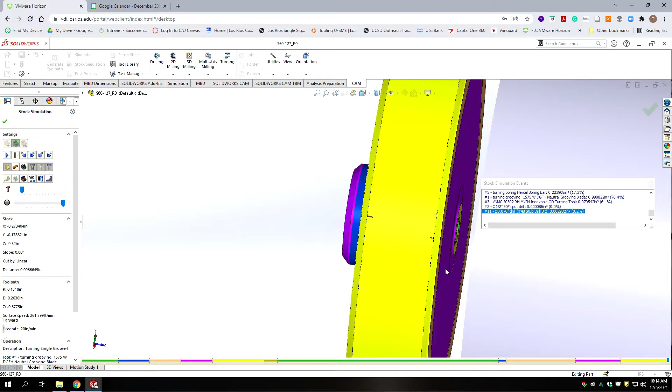So all we need to do is the 6-32 tapped hole and the interior work, which we can copy from the first side. Okay, so let's do that.

We're going to click on lathe op 1, copy, and then paste. Then we need to right click on it and make sure we make it the default folder, so anything new we do is in there. We're going to change the name to op2, and we can delete the 1 in brackets.

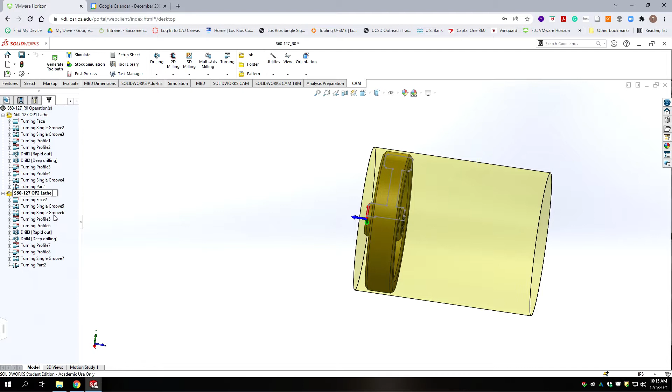Okay, and we're going to go into that setup. We edit it, and it's still a turn op. It's going to be op2 for the lathe. We're going to keep a cylindrical stock, but at this point we don't have any extra material on any of the sides.

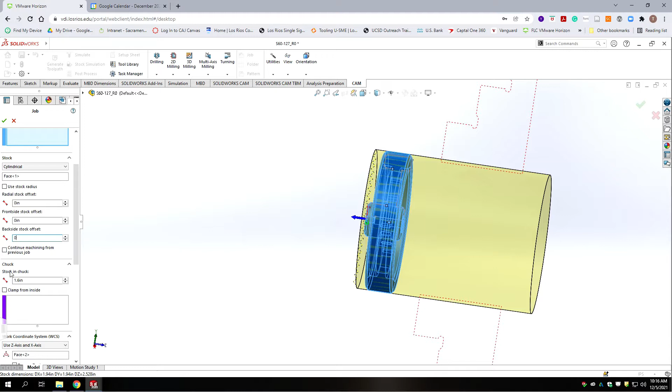Okay, we're continuing from the previous machining job. How much is in the chuck? That depends on how we're holding it. If we were going to hold it on the outside, it'd be the majority of the part. If we're going to hold it down on the hub, it would be just the hub.

For safety, I'm going to go ahead and assume that we have it in the chuck, and so we're going to set that as if actually the majority of the part is in the chuck. We shouldn't be doing any exterior work.

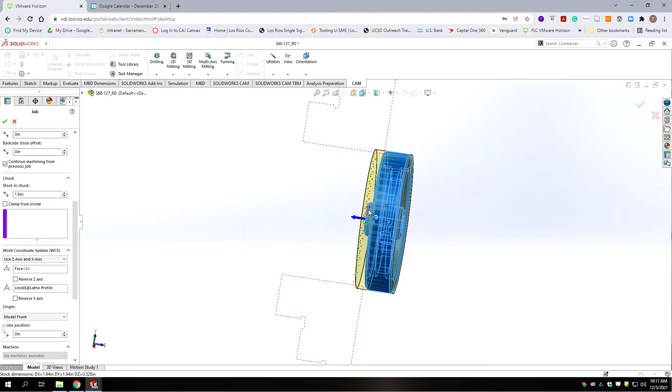Now, from a surface finish standpoint, I'd much prefer to hold this with a collet. It doesn't damage the surface like a chuck does. Won't make marks on that nice machine finish we have on the outside. It's also easier to keep things safe. Assume worst case scenario, we don't have access to a collet for this.

It's really for collision detection, that's the purpose. So in our model, our overall height of our part is 0.52. So let's put that in, 0.52.

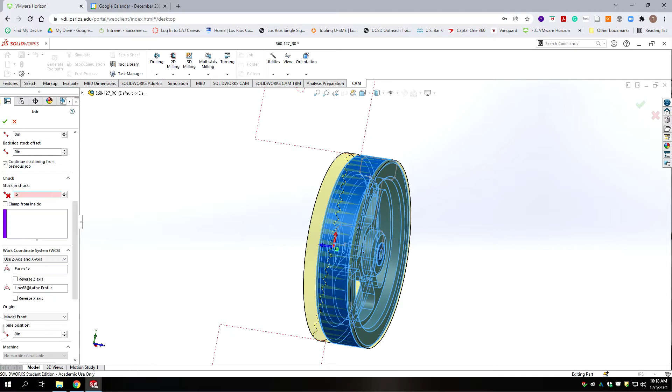Now right now it's facing the wrong direction. Okay, it's backwards in our chuck. And that's because of our origin.

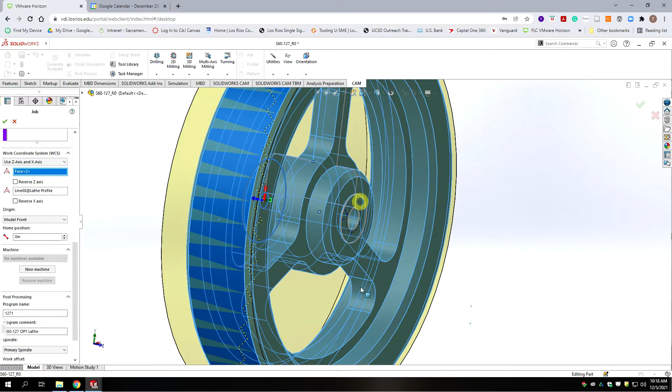Okay, so we're going to scroll down, and it's still going to be model front, but we're going to change the face that we're using for Z, which goes to the opposite side. And the X is still facing in the same direction as our sketch, so that's good.

The outline of the chuck is now changed, so we don't need to reverse anything. It should look like this. Make sure it's in the same orientation as your sketch.

And then we're going to go back and we're going to change our program name to 1272. It's going to be op2 for the lathe. And then we can accept that.

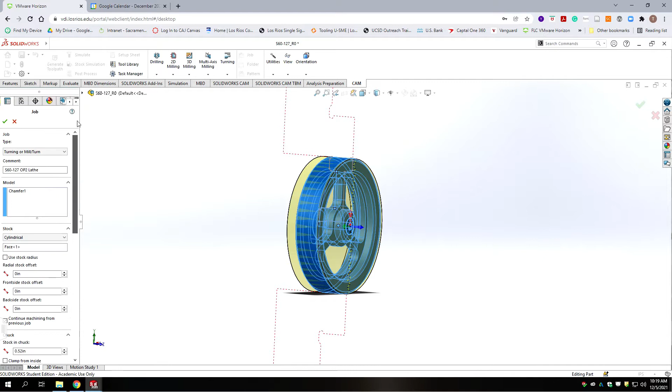Okay, so there's our new stock. In reality, this material is not really even there anymore, but if you wanted it more accurate, you'd have to model the part at different levels of stock.

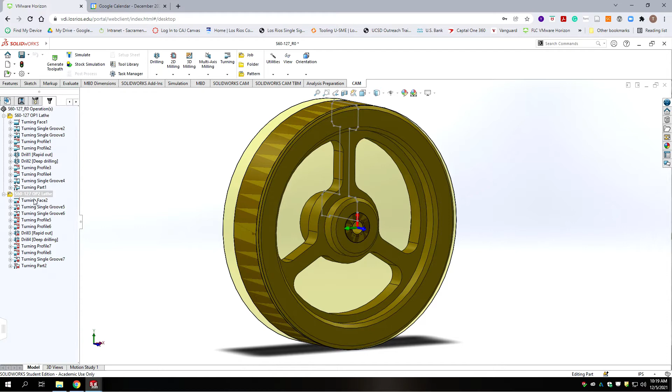Okay, so of all the routines we have here, we shouldn't really need a facing operation. So we don't need that operation. Assume we've got our process dialed in enough that we don't need to do that over.

Okay, so then we're going to go to the next step, and we've got our turning groove, and that came in and just did a partial groove here. We don't need it. And this is the one for the backside.

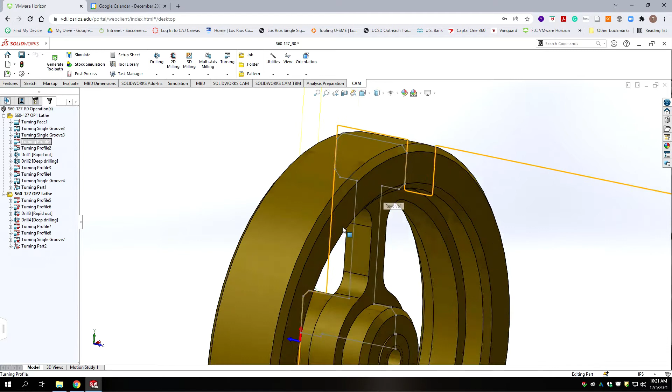Okay, so then we got our turning profile. So that was turning profile 1 on our previous operation. So that one came in and did a chamfer. We don't need that one because we can't reach the chamfer with this particular tool.

So we're going to have to redo that routine. We could leave it in there, but I think its job is going to be taken up by a completely different tool. So let's go ahead and remove that turning profile.

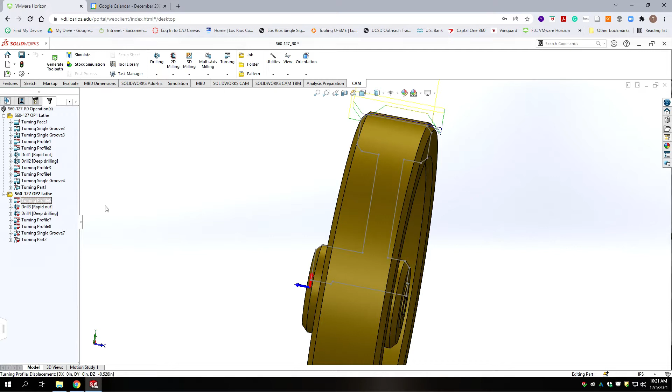Now this second turning profile is doing the outside, so we don't need that one either. Okay, we've gotten down to our spot drill.

We'll need that. We'll need a deep drilling cycle, but we're going to use a different drill bit, so we'll recycle that one, and then we're going to have to add a tap cycle.

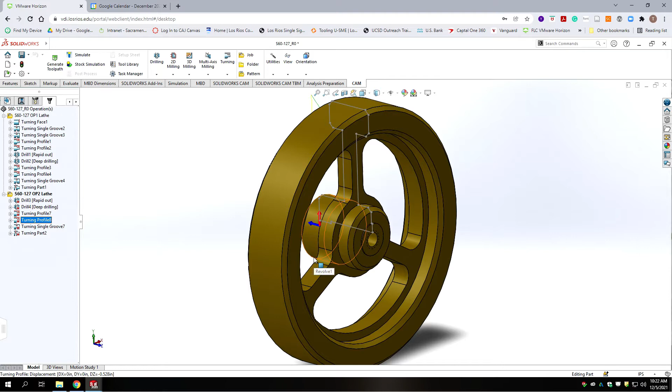All right, let's go to the turning profiles. Okay, so we've got our initial groove. We're going to need that. We have a hub on this side. And then we have our next turning profile that machines the balance of the pocket away.

We need that. And then we had our single groove that came down and cut this feature here. We no longer need that. And the last one's the parting operation, which we don't need either because we've already done that.

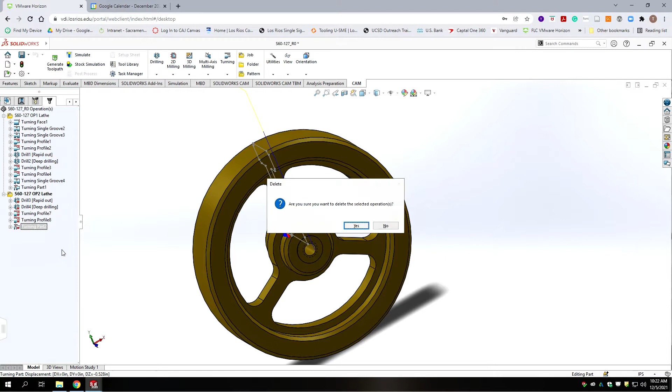Okay, so we got this reduced down to 4 copied routines. We're going to have to add a couple to do chamfers. At least one to do a chamfer, and we're going to need to add a tapping cycle. Other than that, we've got everything ready to go.

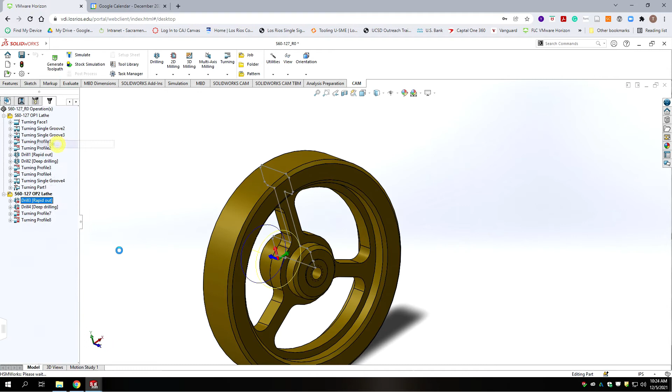Okay, well, let's just follow suit and let's just start with what we've got. So we've got our spot drill. We're going to edit the spot drill. And we want to go to a chamfer that's big enough that it accommodates the major diameter of the thread.

Okay, so the nominal major diameter of a class 2 6-32 thread is 138 thousandths.

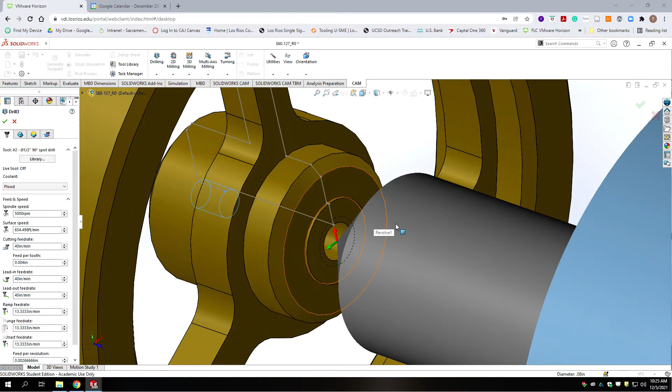Okay, so we're going to go to the Geometry tab. We're not cutting the face that's selected. We're cutting the hole from the other side. We're going to the Next tab, and we want to put

negative 138 thousandths divided by 2. We're going to subtract 0.01 from that number, making it larger. Negative number, go a little bit deeper.

Next tab, or accept the default, and accept. Okay, so we have a chamfer that should be slightly larger than the threaded hole once the thread's established.

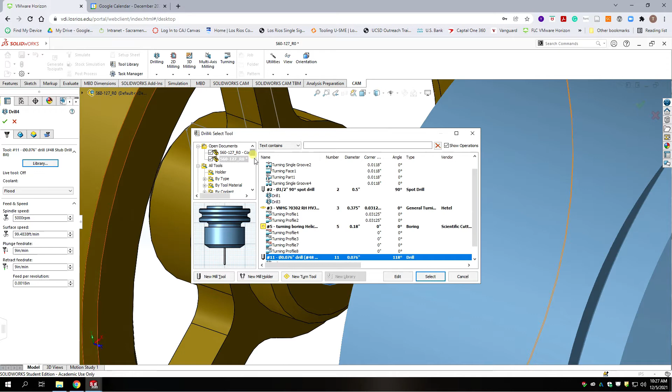Okay, we're going to go to deep drilling. We're going to go edit. And we need to switch tools. We need from the lathe library, we need the tap drill for the 632.

So if we look at our list, the tap drill for the 632 is the tool number 9, 107, number 36 stub drill.

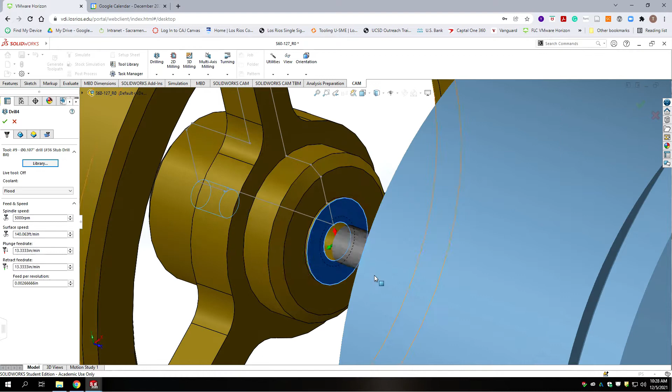Okay, we're going to select that drill. It should be a little bit bigger than the last one we had. We can leave the feeds and speeds alone. We're going to select our hole, which is the threaded hole.

And if you notice it's going shallow, that's because some parameters we have set that we've copied from the previous operation. So in the previous operation, remember, we selected a face as the bottom, and then we said we wanted to go 0.14 deeper. Okay, so we're going to go from hole top, but we're not going to go to

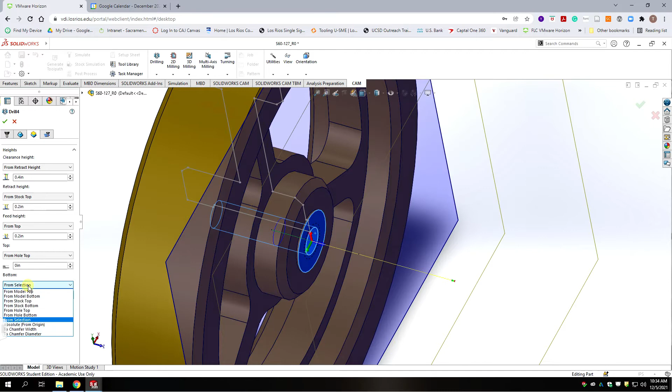the selection we have here. We're going to go to hole bottom, and we don't want to extend 140 thousandths or we'll blow out our 2 millimeter hole at the bottom.

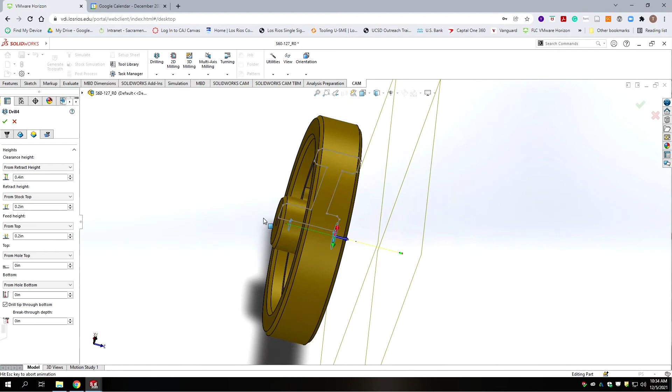So we do want to break through with the tip, but we're going to put 0 under the parameter for breakthrough depth. So the resultant should be pretty much what we modeled at this point.

Okay, we're going to the next tab, and we're going to do a peck depth of half the diameter, so 0.107 divided by 2. So our peck depth gets a little bit bigger because it's a bigger drill bit.

And it's not going to be taking a full diameter off because remember we've already pilot drilled this with a 2 millimeter. So this actually might be a little conservative, but it'll make a little noise, but hopefully it'll be a truer hole the way this works.

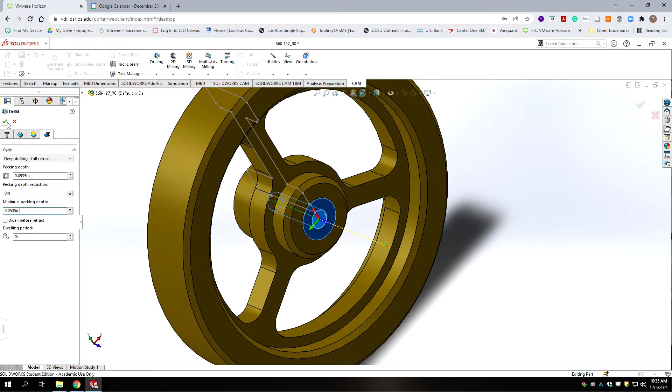Okay, we're going to hit accept. Alright, so now we've got our threaded hole going through, or the tap drill for it.

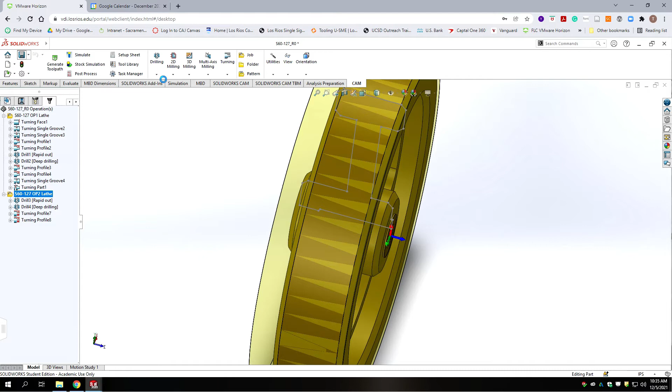Now we want to go ahead and do the tapping. So we're going to go drill. We're going to select from the library. We're going to go to the lathe library, which I keep skipping. The lathe tool library, and we're looking for our tap.

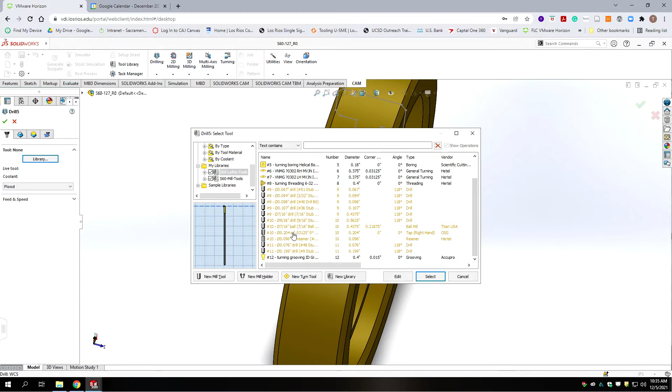That's tool number 10. I never liked 1000 RPM with a tap. They break so easy. It's not worth it. Okay, we're going to select our hole.

And we're going to go to the next tab, and we're just going to go to the bottom. We don't want to break through. We should have enough clearance at the bottom of the hole, so the default setting should be fine.

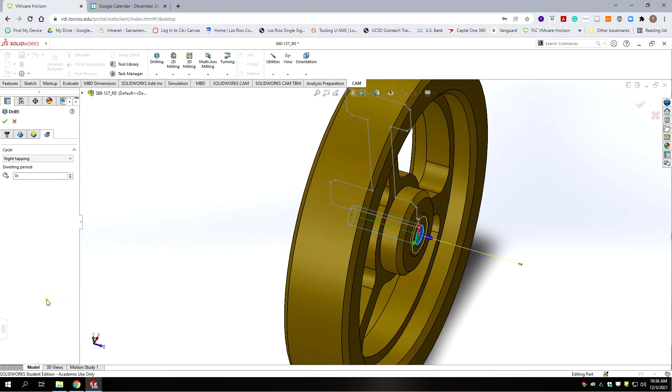I would force it to be right hand tapping. It outputs a different code, but just to be careful, and hit accept. Okay, so there's our threaded hole.

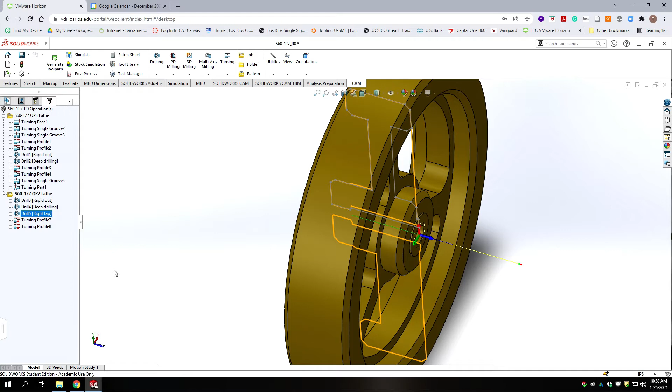Now sequence wise, it doesn't really matter whether we do the drilling before the turning, but you want to put the drills together so they can go in sequence. Typically you put them in the magazine or the turret close to each other so they don't have to move very far on tool change.

Again, we need to do a relief groove, which is this first routine, and then we need to do the turning that's going to remove the rest of it. We're going to use the same boring bar, but as you recall, we had to use two different sets of geometry. So currently we have the wrong sketch shown for this profile.

Okay, so we're going to go back to the lathe tools, and the first profile, we're going to edit it, and we should be able to keep most of the parameters the same. So we'll leave the first tab alone.

On geometry, we're not selecting this line. We're going to select the one that's on the side of the part that we're working on, but it's good that it highlights which one we're using. So we'll select the opposite side.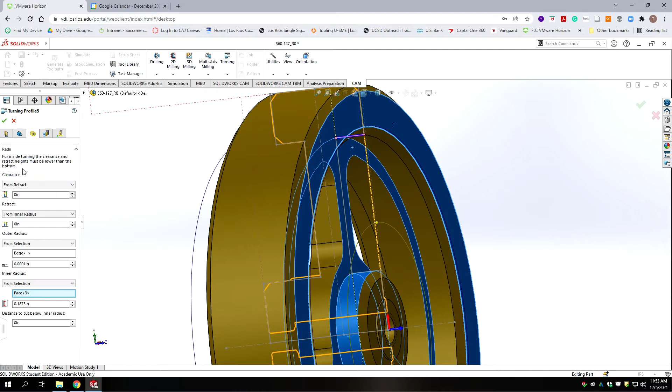We're going to need to select confinement, and we're going to select the top and bottom of our pocket. We'll go to the next tab, and then we're going to go to our heights, and I think we can leave this all at default, and we should be able to leave all this at default. And on the last tab, we should be able to leave all this at default.

So let's hit accept. Yes, we've got a safety warning. We want to go straight in and straight out, and we get our groove. And now this makes it safe for our other cutter to come in, or the same cutter to come in, but to do multiple passes and drag back without hitting material on the back side of the tool.

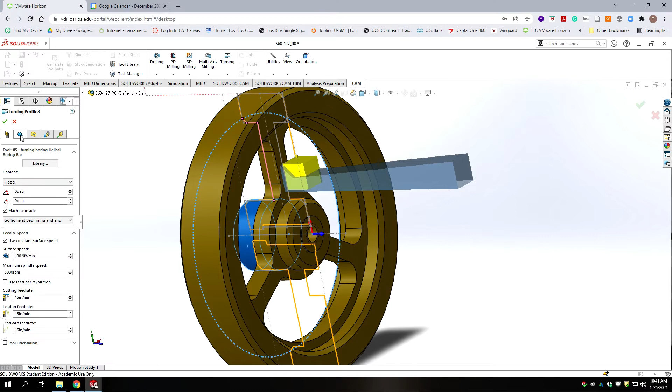Alright, that was relatively painless. Now let's go to the next one. We're going to edit this routine. We're going to leave everything the same on the first tab, we're going to leave it alone. On the next tab, instead of these three profiles, we're going to clear those out.

And then we need to switch our sketches. So if you pull down this menu, if you're careful, we can now hide the revolve sketch and display our section view, which is what we need for this one.

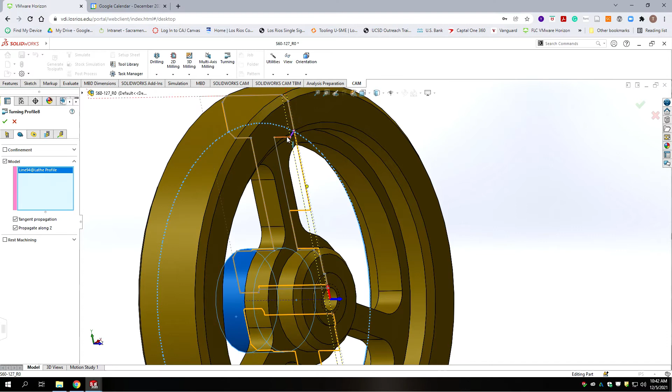Okay, now that we've done that, we're going to select the chamfer, this line, and this line. We go to the next tab. All this should be pretty much at default. We can keep the same face selected, but to be safe, let's switch that over to the other side.

But when we do that, we have to reset our spacing. So we had that set at 300 thousandths when we had it selected before. Next tab, we're going to leave it default. Last tab, we'll leave it default. We'll hit accept.

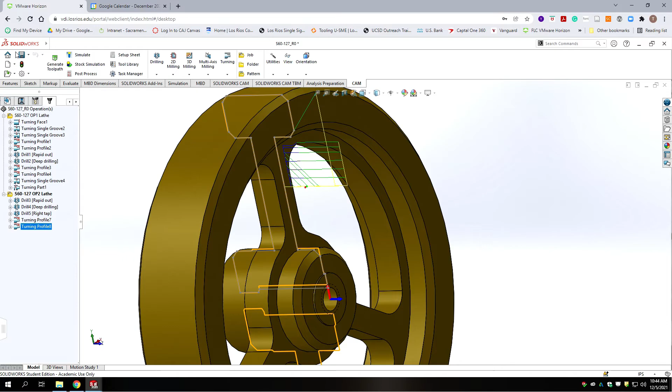And now we get our routines that just cut in that zone. We're going to do the last routine for this part, and that's to cut the chamfer on the hub here. Not a real critical feature, but we do want to make sure we don't gouge anything else.

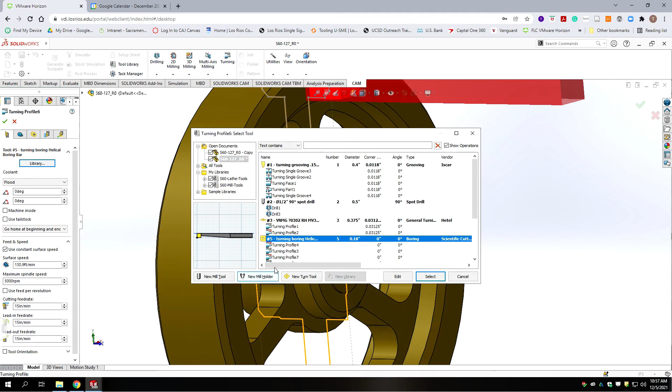So we're going to go to turning, and we're going to do a turning profile. And we're not selecting the default tool that's coming up here. We're going to go to our lathe tool library, and we're going to take tool number 7.

Okay, we'll leave everything at default on the feeds and speeds. On the geometry tab, we're going to select model, and we're going to select the single segment. Then on confine, select the larger face, and then we're going to pick the edge of the boss, not the surface, because it'll force it to machine that surface.

And we're going to go to our outside tabs, and we're going to go to selection, and our selection is going to be the outside of the hub, convenient diameter, and then we're going to go to selection on the second, and we're going to pick the edge of the top of the smaller diameter of the chamfer.

Going into the next tab. Okay, we're going to switch from allowing axial and radial grooving to not allow any grooving. We're not going to do any rough cuts, and we're going to use wear compensation. On our last tab, we want to increase the retract amount to 0.3, which is a significant amount. We want it to pull out so that after it cuts the chamfer, it's not going to retract into our outside diameter.

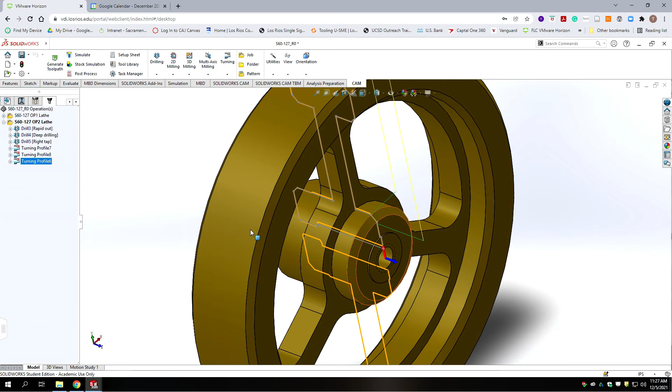Okay, and we don't want the lead out to be the same. So we want that to be at 90 degrees. And we want it also at 0.3 so that we make sure we clear the part. After that, you should hit accept. And we should get the toolpath that looks like this. So it's cutting the absolute minimum on the diameter.

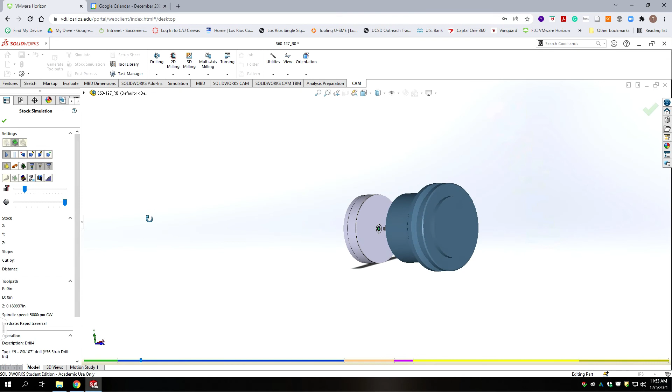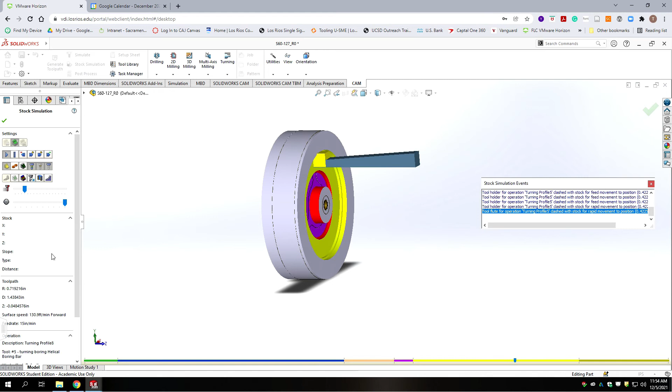Okay, so I'm going to do the quick simulation. It'll show what the second side of the part looks like. Center drill, coming in with the tap drill. I'll speed this section up on the video. Tap. Of course, we're getting our gouge warnings from this tool that are phantoms. And then we cut our chamfer. Okay, so we should be done with that operation.

Now it's time to move on to milling. We've completed our turning operations. We're going to collapse these down because we need to do one milling operation. Now I would suggest that we use this boss here as a locating feature. Everything is turned around it. You could potentially even put a 2mm pin in to locate more accurately.

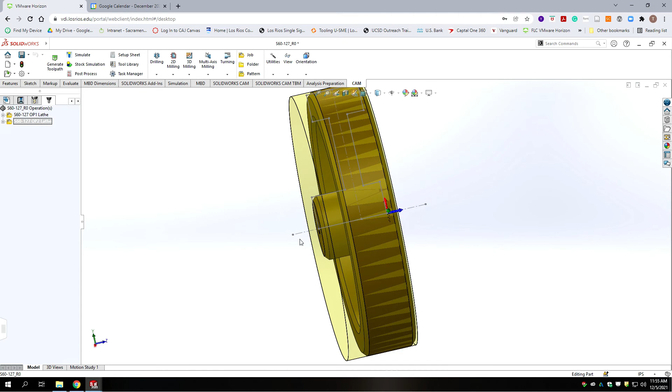And then we can clamp on either this surface or this surface in a vise with a soft jaw or fixtures that center it. And then we're going to come back and just cut these windows. So it's really only one routine, but the setup for the fixture to build this would actually take longer than cutting the actual part. So there's different ways of approaching this.

I'm going to put the origin at the top center, and that would allow us to use a probe or indicator to locate center of this hub off any of these round features, or even the outside diameter of this pocket. And that would allow us to dial it in so that at least these cuts are as close to concentric as we can after switching processes.

Another approach would be to put the origin at the bottom. You would indicate on your fixture instead, then drop your part in. That might be a little more accurate in the sense that you would be locating and indicating in on the side of the part that was turned first, and so that would be concentric to the majority of the features which were made on the first operation.

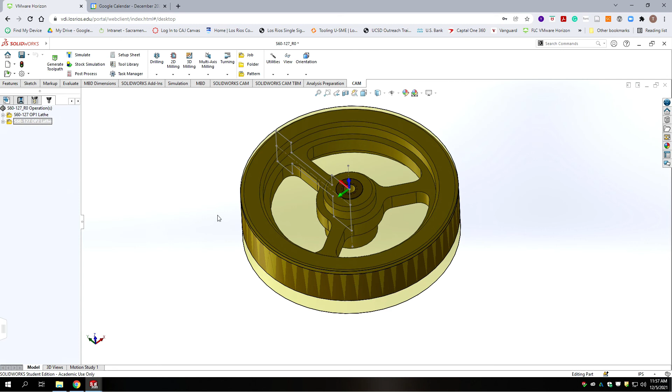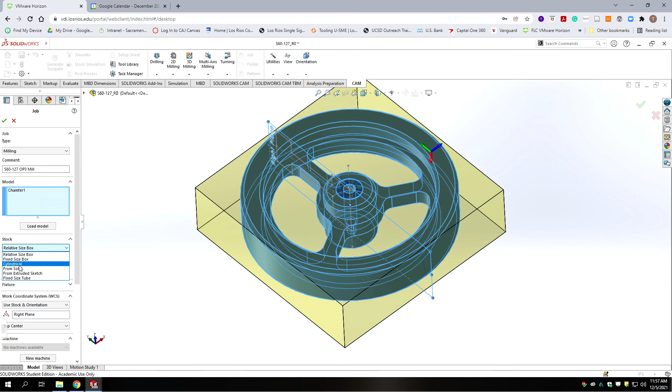But there's different approaches. So again, let's go with a new job. This one is going to be milling. This will be the S60-127 Op 3 for the mill. Okay, we're not using a relative size box. The stock is actually the part itself, but we're going to be cutting. Yeah, let's just say it's from Solid, and we're going to select the model itself as the stock.

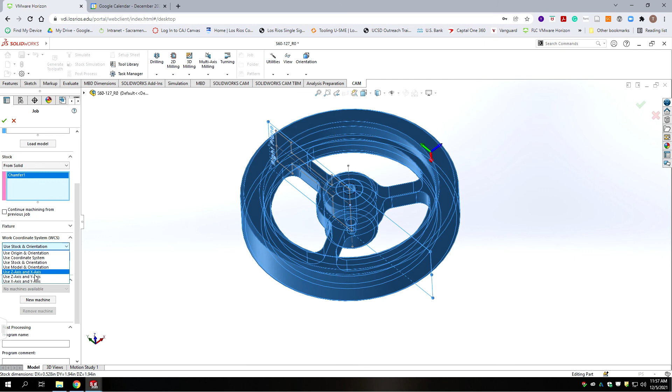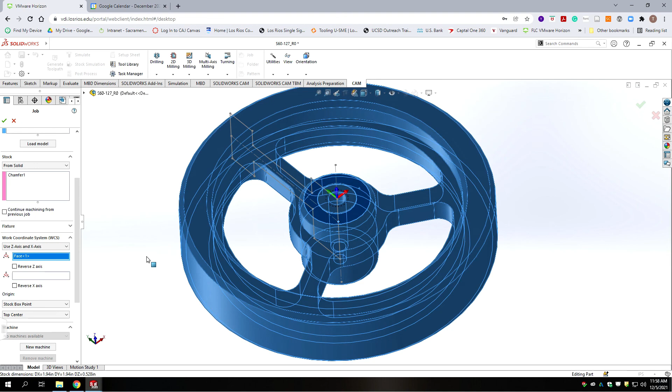All right, so our origin's moved over to a weird place, and we're going to use Z-axis and X-axis origin. So we're going to pick this surface as our Z-axis for up, and it snaps automatically to an origin that's here on the center, so that's good. But our X-axis, it really doesn't matter. If we want it in line with one of the clockings, I guess that would help us. But either way, let's just leave it where it is. Okay, so our X-axis, center of our threaded hole, X and Y.

Alright, so because at this point the part is symmetrical as far as its circularity until we cut these holes in it. So now we've got our stock box point, top center is fine, and our program name, we're going to call that 127 3, and program comment S60-127 Op 3 for the mill.

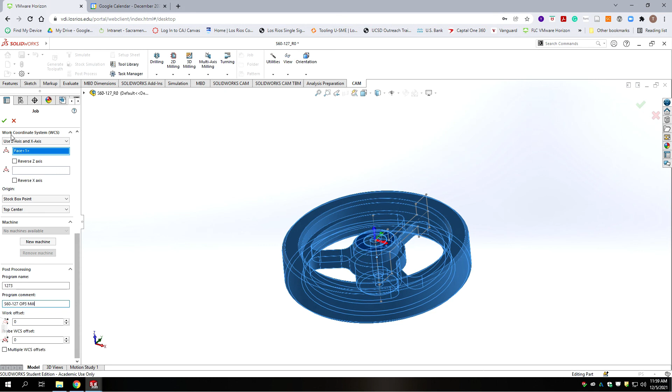I don't know why I like the op capitalized. When it outputs in the post processor, everything's going to be capitalized. Okay, so let's accept that. We're going to change the job to reflect the name, S60-127 Op 3 for the mill.